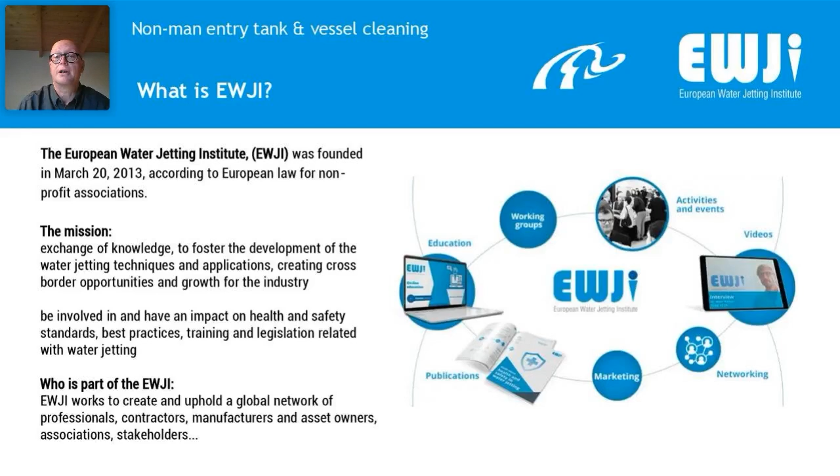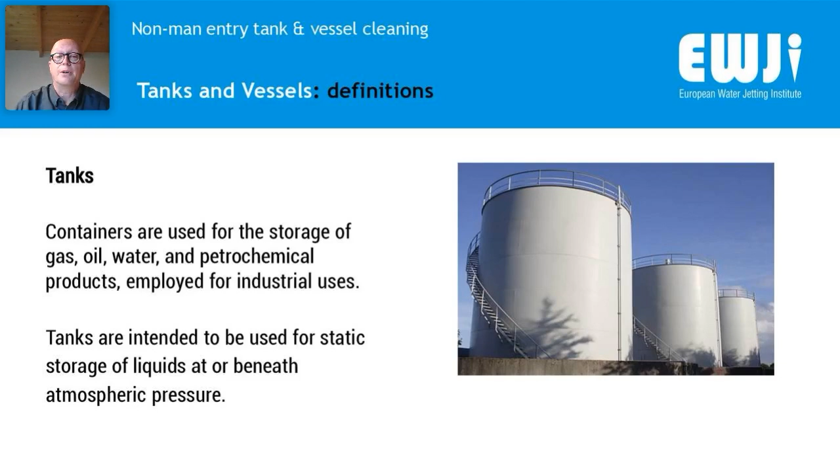So, tanks and vessels. Let's have a quick look at the definitions. Tanks are typically containers used for the storage of gas, oil, water, petrochemical products, typically employed for industrial uses. Usually tanks are intended for static storage of liquids at or beneath atmospheric pressure. Vessels are usually containers designed to hold liquids, vapors or gases, crucially at pressures above 15 psi, or 3.29 bar here in Europe. In particular, vessels store products such as petroleum, chlorine and ammonium.

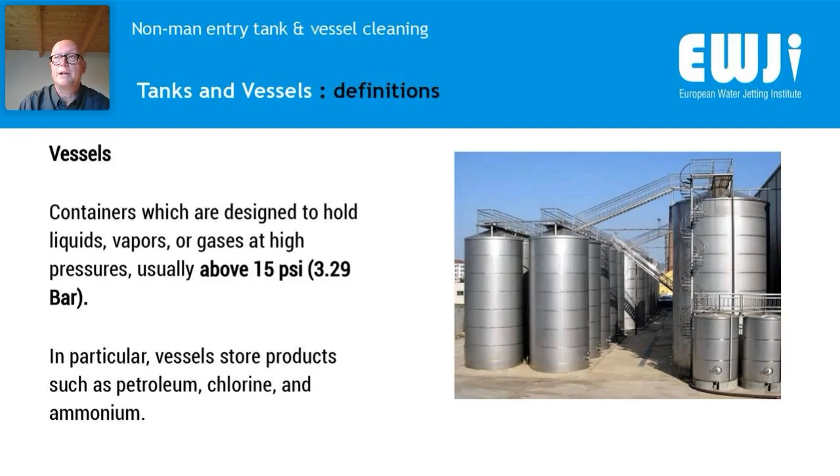So here we're going to look at the three concerned parties in non-man entry tank cleaning: the asset owner, the contractor and the manufacturer, and we're going to talk about the relationships between them and the key decisions they make.

Looking at the asset owner and the contractor, the asset owner's requirements and priorities need to be clear. They need to be clear on the job in hand, the execution, and compliance related to reducing risk methods. The contractor in turn needs to make sure the asset owner has been made aware of the technology and the safest methods of automation available. This then allows both of them to make the best possible informed decision.

From an asset owner's perspective, considerations need to be along the lines of timeframe: how quickly does the job need to be done, when does it need to be completed, proper handling and disposal of the waste product generated from cleaning the tank or vessel, and safety and environmental issues concerning potentially hazardous products coming from the tank, including entry hazards and emission hazards produced from the cleaning.

There needs to be consideration from the asset owner on the proper industrial cleaning method or methods, as there may be more than one, for cleaning the tank and vessel. This includes securing a qualified and competent company to carry out the safe cleaning of the tank, and the economic factors and quotations for the cleaning operation.

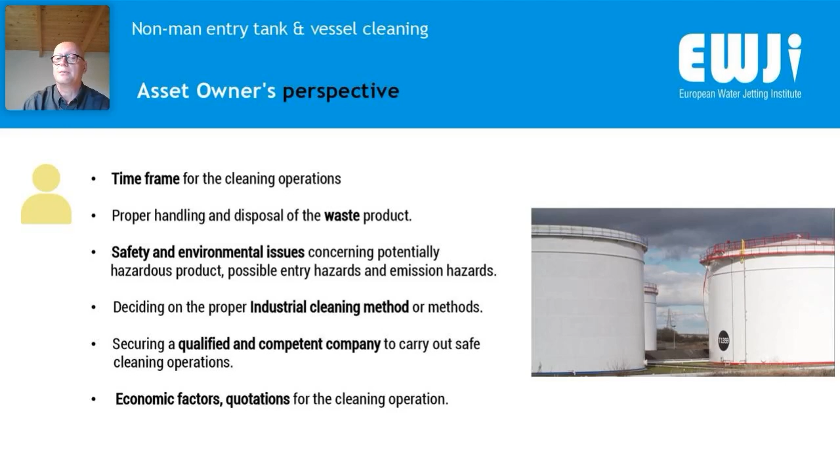From the asset owner's perspective, there's the time of year and weather issues. Certain times of year bring certain challenges - summer being hotter weather, winter being colder, brings its own challenges as well, such as ice, freezing, and snow. There's also the complexity of the cleaning operation - some tanks have built-in mixers, sensors, turbulence plates, etc., which adds complexity to the cleaning.

The asset owner needs to have an expected quality of the cleaning operation - what standard are they expecting to achieve. There may be joint operations with two or more companies, involving cranes, hand workers, electricians, etc., which adds several challenges.

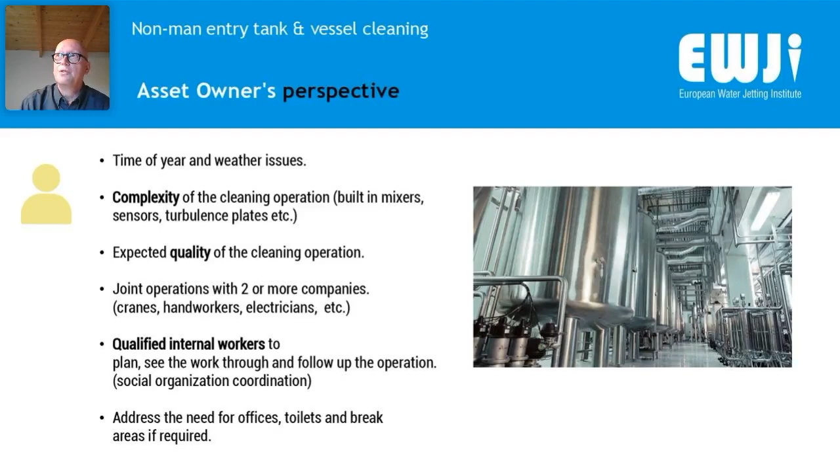Considerations also include qualified internal workers, the plan that will see the work through, the follow-up of the operation, the social organization, and the coordination of everything working together harmoniously. The asset owner would also need to address the need for offices, toilets, break areas - all the social aspects that need to be included on the site.

From the contractor's perspective, they need to approach more customers to involve stakeholders early in the tender process, involving client maintenance managers, HSE, on high-risk activities with low-risk methods. There needs to be a changing mindset to move away from the traditional hands-on approach to a safer, hands-free, non-man entry cleaning method, and this takes time.

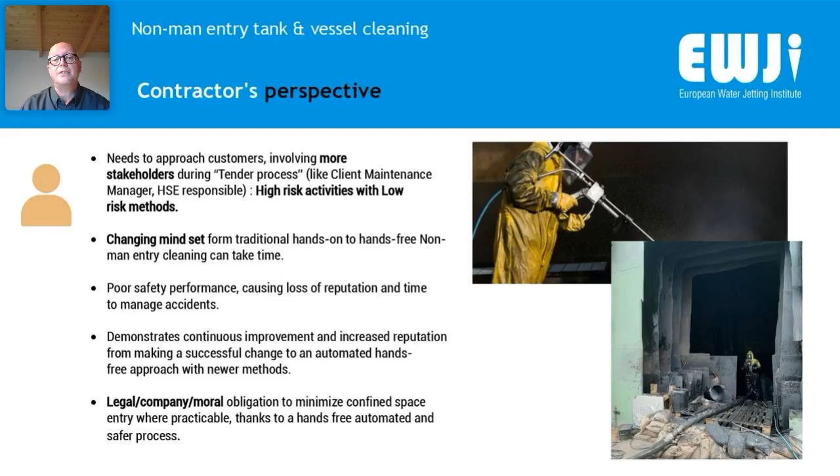From the contractor's perspective, poor safety performance leads to loss of reputation and time spent managing accidents. There needs to be a demonstration of continuous improvement and increased reputation by making a successful change to an automated, hands-free approach, which newer methods will demonstrate. There's a legal, company, and moral obligation to minimize confined space entry where practical - thanks to a hands-free, automated, and safer process.

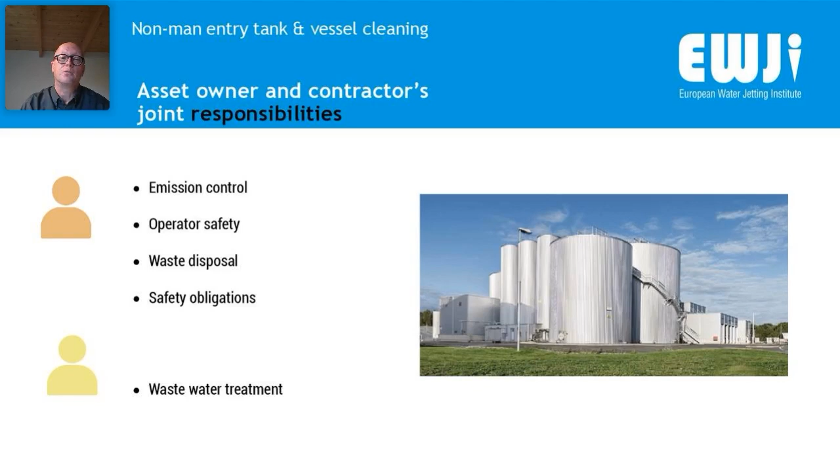It's the asset owner and the contractor's joint responsibilities to consider emission control, operator safety, waste disposal and safety obligations, and also the wastewater treatment that's produced thereafter. From the manufacturer's perspective, the manufacturer needs to have a good and clear understanding of the asset owner and contractor's joint expectations, a good and clear understanding of the application, the equipment sustainability, the on-site conditions, and the timescale to achieve the job. That's my part of the presentation completed.

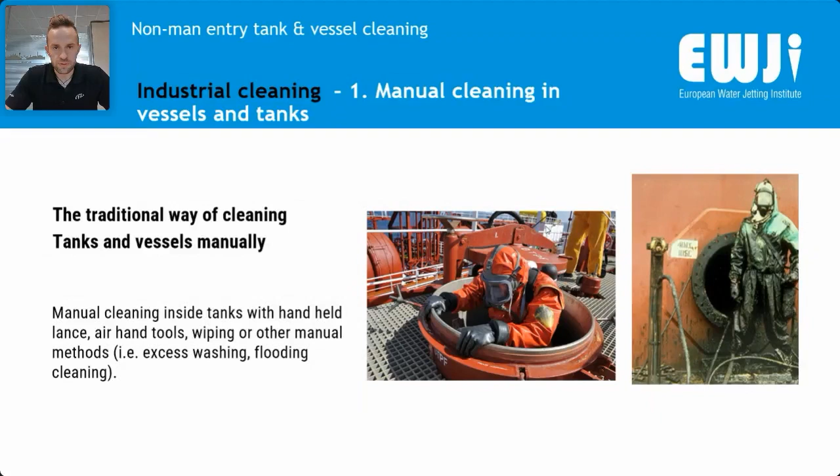There are pros and cons. The pros are that the costs are lower for equipment, that the workers are already familiar with the manual equipment, the mobilization is usually easy, you don't need a high-skilled workforce, and the job usually is simply done.

The cons are that the risk is very high for the operators who are exposed to the hazards, both of the materials and the gases present in the tanks. The operator usually gets tired due to the manual operations. They need breaks, and breathing apparatus is usually required. There are also visibility challenges like misting and lack of lighting, and you definitely need first aid on site.

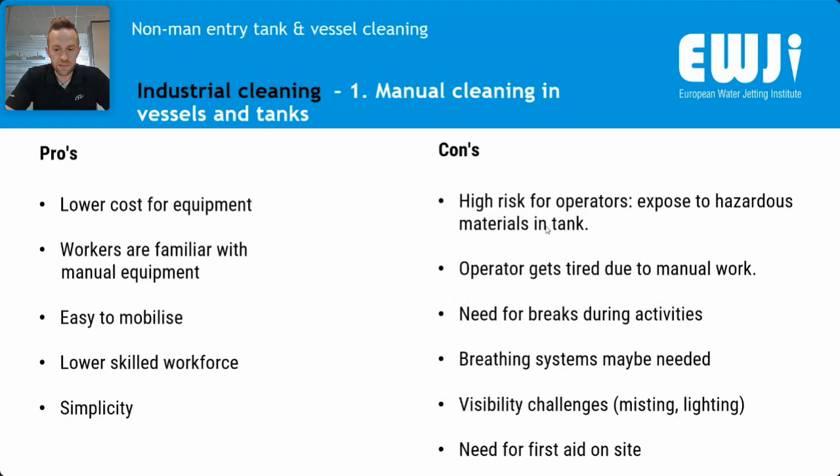We have semi-automated cleaning in vessels and tanks. In this, we're going to talk about 2D tools.

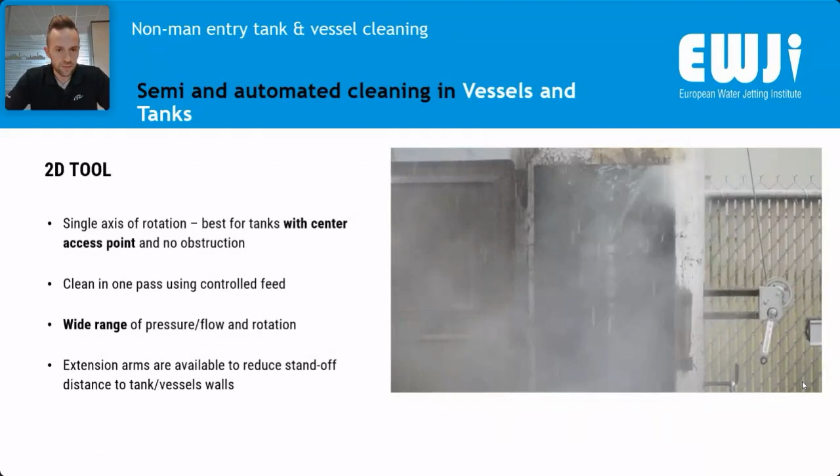We have in this video a single axis of rotation, which is preferable to be used in tanks which have a center access point and without obstruction. The cleaning is done in one pass using controlled feed. We have a wide range of pressure, flow, and rotation speeds available, and there are extension arms available to reduce the standoff distance to tank and vessel walls.

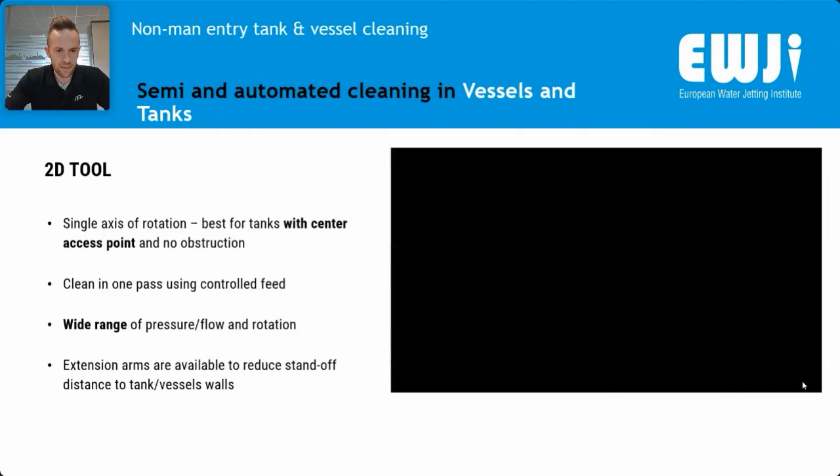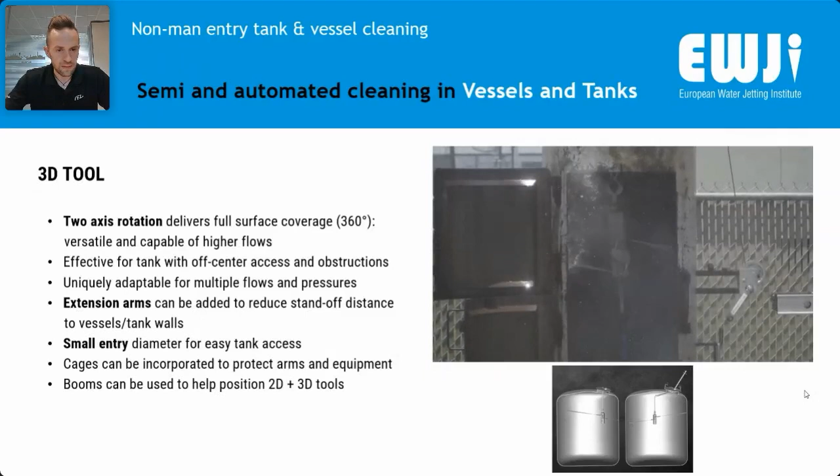We can also have 3D tools, which have two axes of rotation and deliver full coverage of the surface to be cleaned. They are versatile and capable of higher flows. They are effective for tanks with off-center access and obstructions inside. They are adaptable for multiple flows and pressures. Extension arms are available which can be added to reduce standoff from the vessel tank walls. They are suitable for small entry diameters.

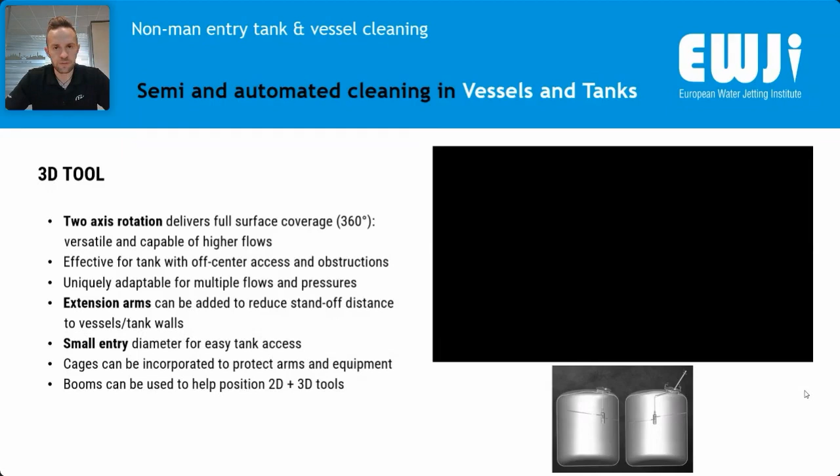And we have cages that could be incorporated for protecting the tool, as well as booms that can be used to help the positioning of the 2D and 3D tooling.

What we call tank cleaning cannons are engineered to mount in existing manway openings. They have a single jet and deliver more cleaning power with higher reach. They usually have 3 axes of movement for complete internal cleaning operation. Cameras are included, and the operation is controlled remotely from outside.

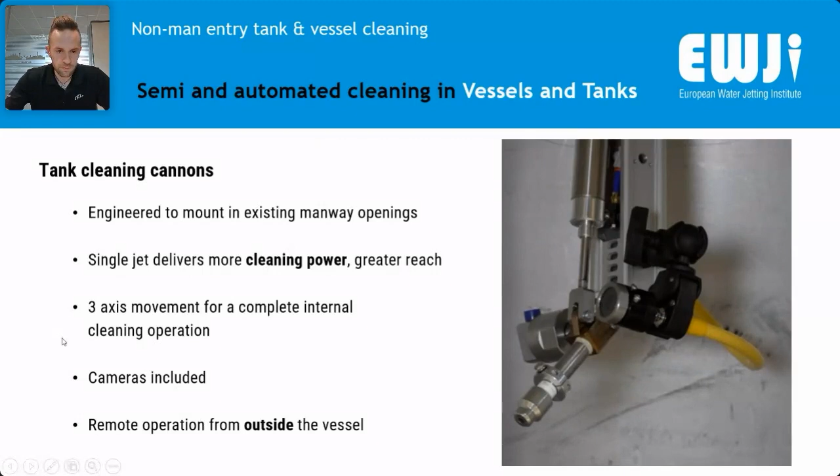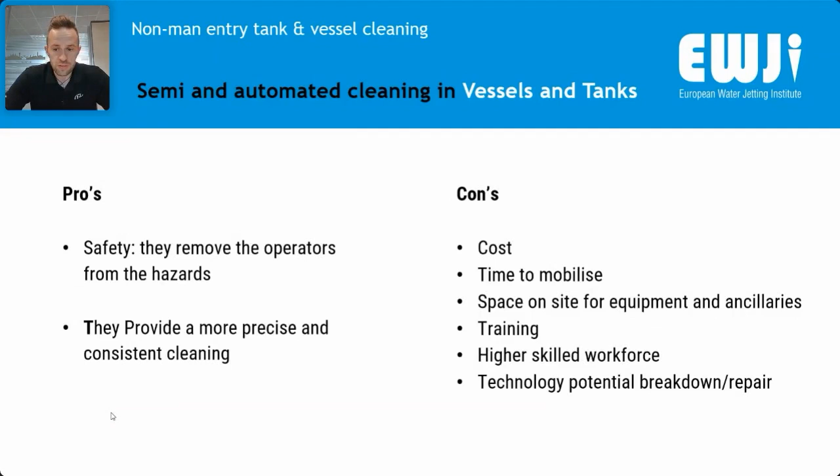The pro of using this kind of technology is definitely safety, because it removes the operators from the hazards and provides a more precise and consistent cleaning. The cons are the cost, which is higher compared to manual cleaning, the time to mobilize, which is also higher compared to manual cleaning, the space on site needed for mobilization of the equipment, training needed for the operators, a higher skilled workforce required, and the technology could potentially suffer breakdowns and need repair.

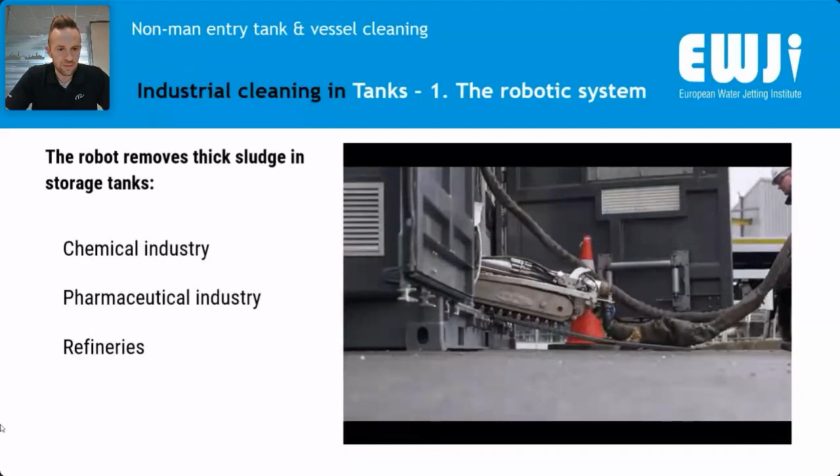The robotic systems that can be used in the tank cleaning process are able to remove thick sludge in the storage tank. They could be used in the chemical industry and in the pharmaceutical industry, as well as refinery.

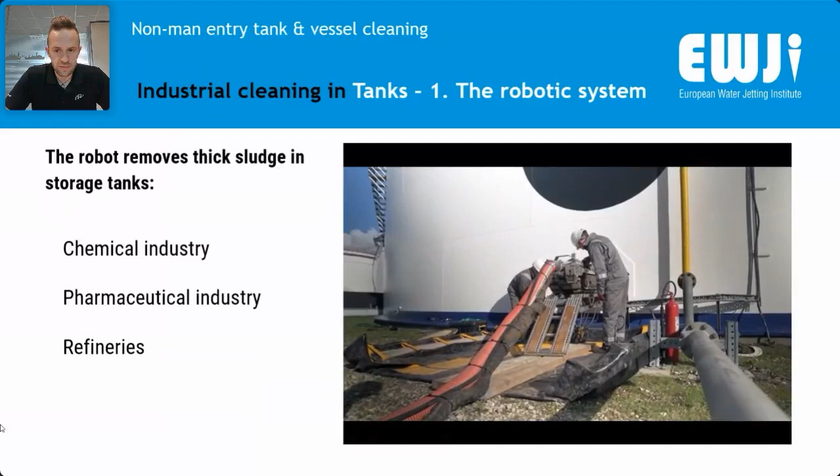In the video that is playing, you are able to see a typical job site organization and how the activity is actually started, while the robot can enter the manway without the need for a person to enter the tank to allow the robot to enter.

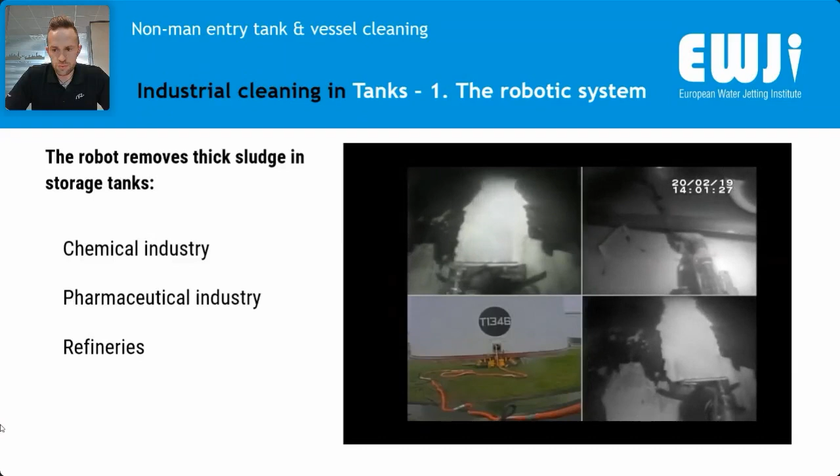The controls are made from a safe distance, and the robot is equipped with cameras that allow the operator to follow and control the operation from a safe position.

Over 200 confined space incidents happen across Europe every year, and the cleaning time can also be reduced by up to 45%. It's considered a safer, faster, cleaner, and more efficient method.

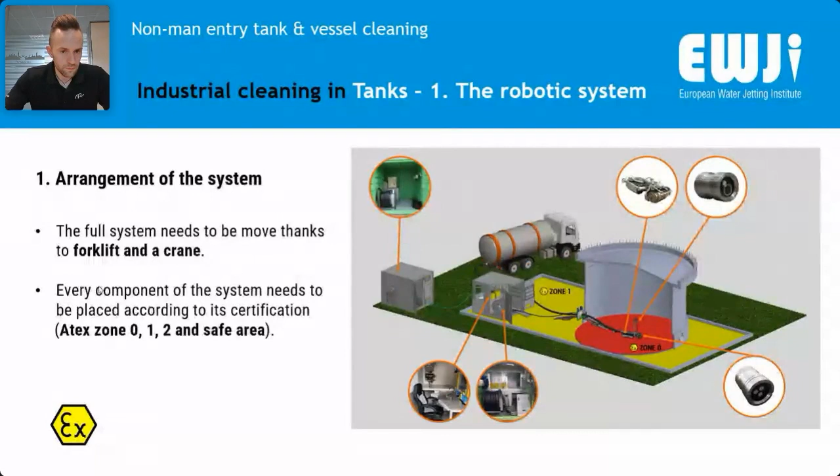The tank cleaning operations are organized with the robot working in zone 0, driven by the operator safely inside the control room, and monitoring the operation through the camera system.

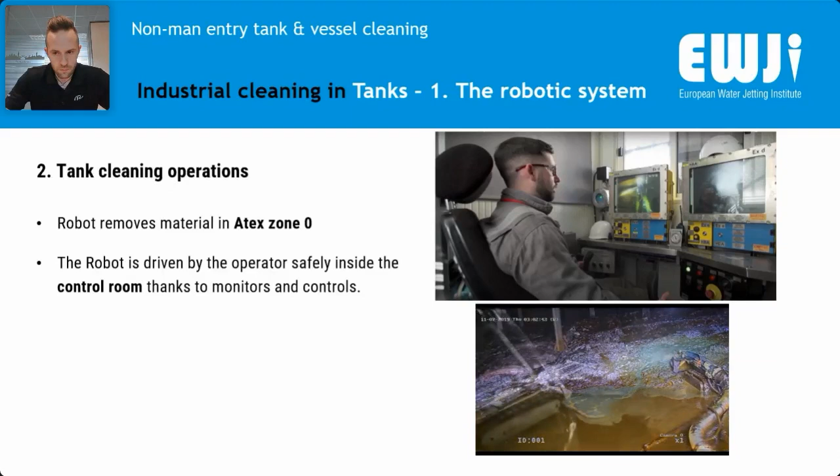The pros of using the method are operator safety, lowered tank downtime, the transformation of variable cost into fixed costs, the ATEX Zone 0 certification for products that ensure maximum safety level, safe and clear remote viewing, and the possibility to customize the system according to job site needs.

The cons are that the system alone cannot do material recovery, the initial time spent learning how to use the technology is higher compared to other methods, the cost and investment is higher at the beginning, the space requirement on site, and the training needed for the person, because in this scenario we need a specialized technician to use the equipment.

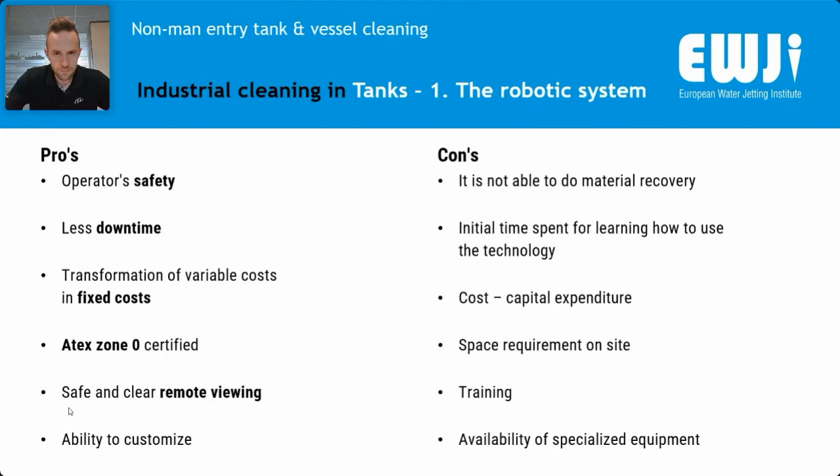The sweeping system is definitely another option that we're going to present through this video. Traditional tank cleaning methods may appear to be low cost, but the man-entry approach results in difficult health and safety procedures, large waste volume, and lengthy downtimes.

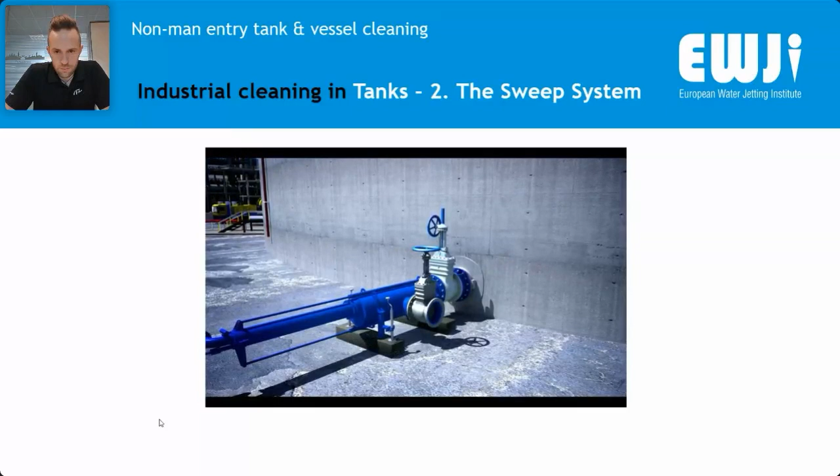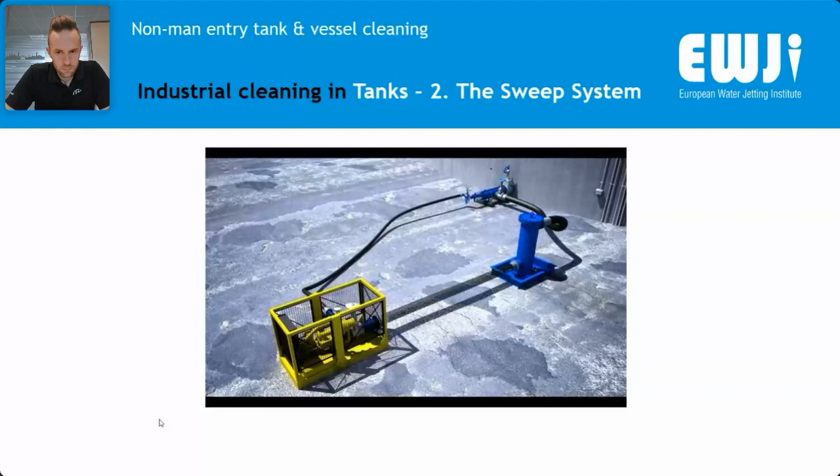A pump is fitted, together with hoses and a filtration unit. The tank sweep jet streams are directed through nozzles into the tank. The contents are circulated under high pressure and carefully controlled. The movement and pressure are strictly monitored to ensure complete mixing throughout the tank. This procedure ensures safe and spill-free operation. The liquid is recycled via the filtration system.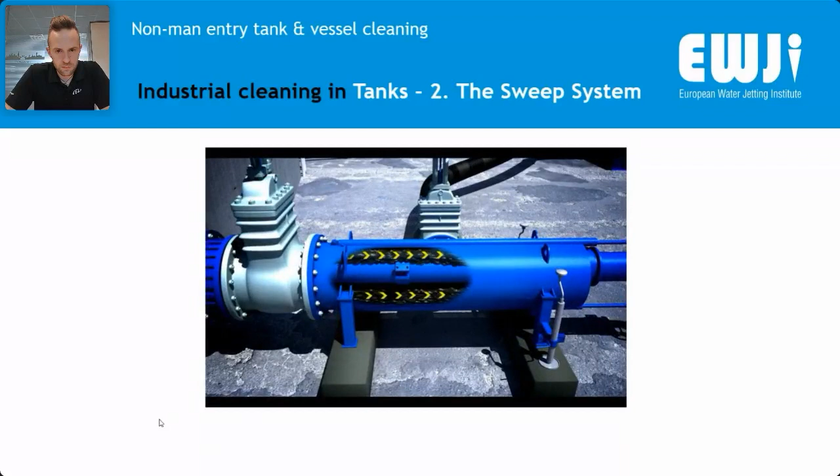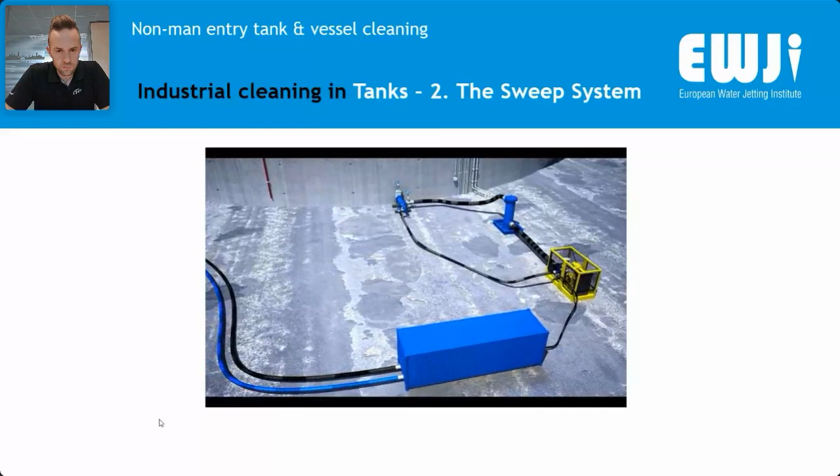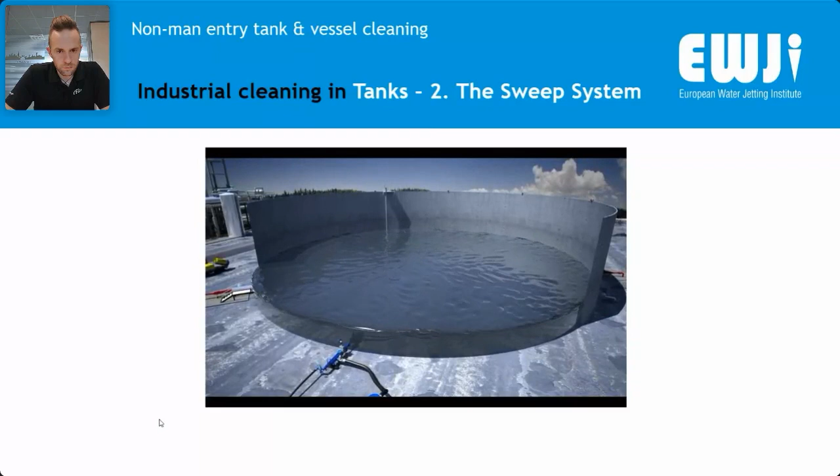Once the tank contents are fully homogenized, slipstreaming commences to direct the fluid to the treatment plant. The treatment plant removes the solids from the homogeneous stream. The solids are separated out, and the oil and water are returned to the tank to maintain the required safe operating level during tank sweep operations. Once the required specific gravity in the homogenized fluid is achieved, the tank sweep operation can end, and the tank is allowed to settle to separate the remaining oil from the water. The recovered oil can be pumped to adjacent storage as required.

The tank sweep process is highly efficient, substantially reduces downtime and cost, as well as being safer and better for the environment.

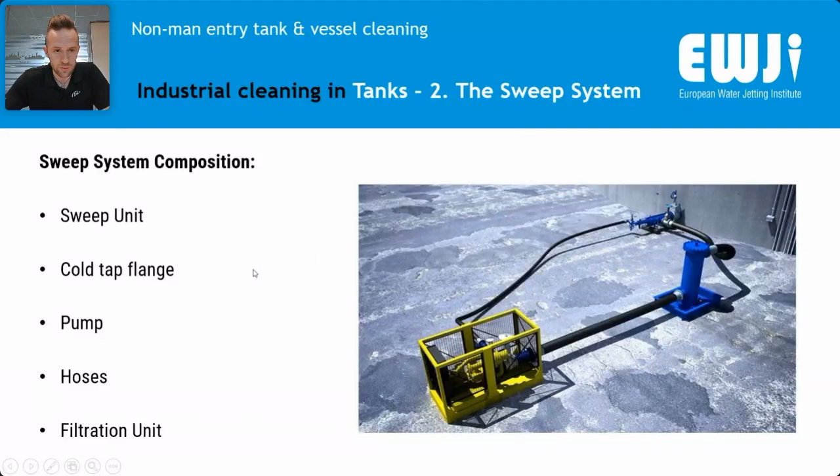As shown in the video, the system composition is made of the sweeping unit, the cold tap flange, the pump and hoses needed, and the filtration unit. Summarizing how this works: the tank sweep jet streams are directed through nozzles into the tank. The liquid is recycled by a filtration system, and the solids are separated out. The oil and water return to the tank. Once the specific gravity required is reached, the process can end.

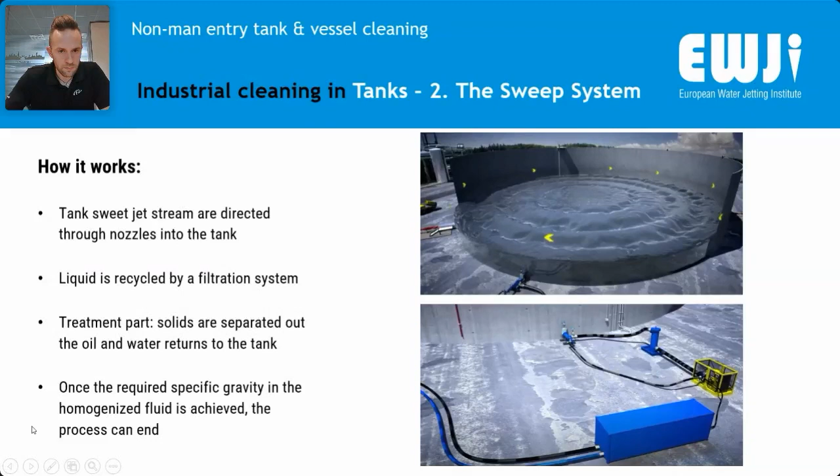The pros of using the sweeping system are that it's more efficient directional cleaning over traditional heat and circulate. It's ideal for crude tanks to allow safe landing of floating roofs, can delay associated waste cost or allow full recovery, can utilize the refinery to process material where it stays suspended, and it's ideal for tanks with high sludge content, which prevents the use of manhatches and safe landing of floating roofs.

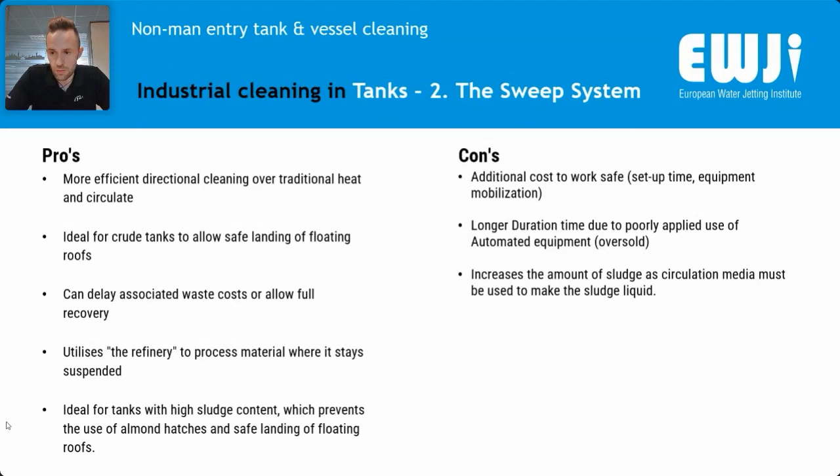The cons are that there are additional costs to work safely, setup time, equipment mobilization, and etc. It takes longer, the duration time being longer due to the poorly applied use of automated equipment, and it increases the amount of sludge as a circulation media must be used to make the sludge liquid.

The other technology available for tank and vessel cleaning is the magnetic crawler, mainly for outside of tank walls and some inside cleaning. They can use water pressure up to 3000 bar, 43,000 psi.

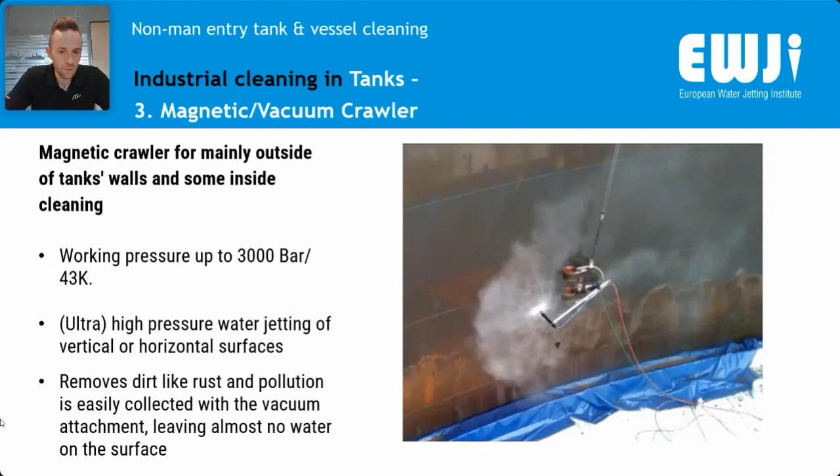They are able to use ultra high pressure water jetting on vertical or horizontal surfaces. They remove dirt like rust and pollution easily, collecting it with a vacuum attachment, leaving almost no water on the surface. There is no need for scaffolding or cherry pickers, and the hydroblasting with vacuum system allows recovery.

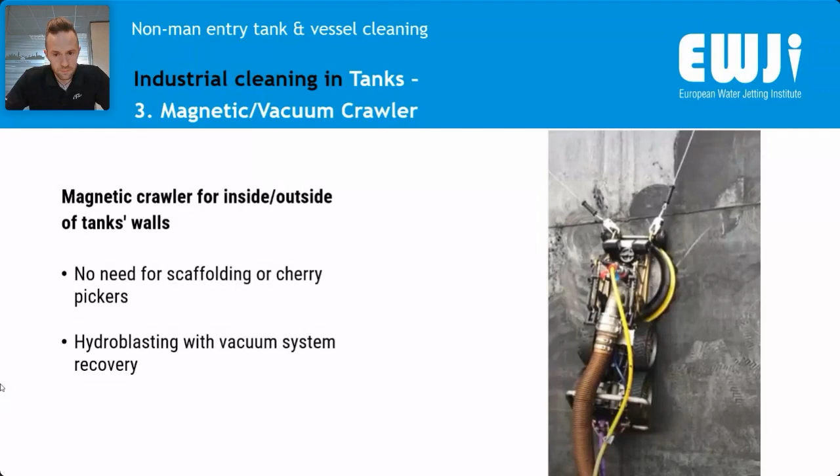The pros are that they are very easy to operate. There is no need for cranes, cherry pickers, or scaffolding. The operation is done from a safe distance. The productivity is good compared to manual methods, and the crawler can be utilized for abrasive blasting as well.

The cons are that there is an expensive investment, training is needed, and there is a potential footprint to consider on site for the pump and the vacuum unit.

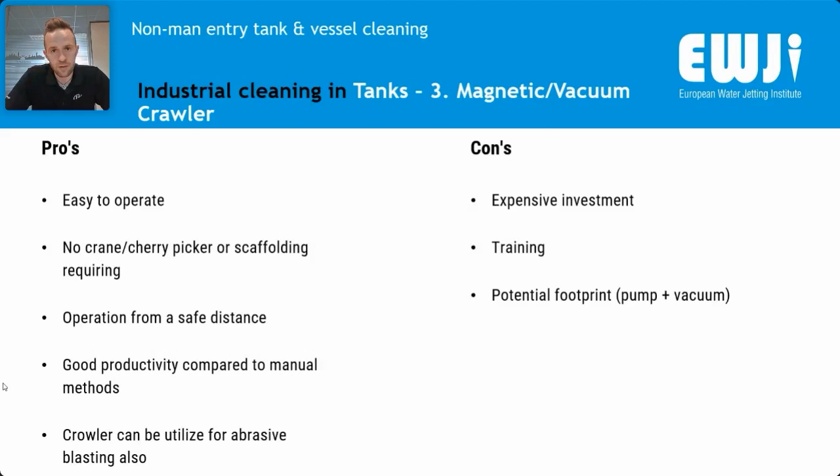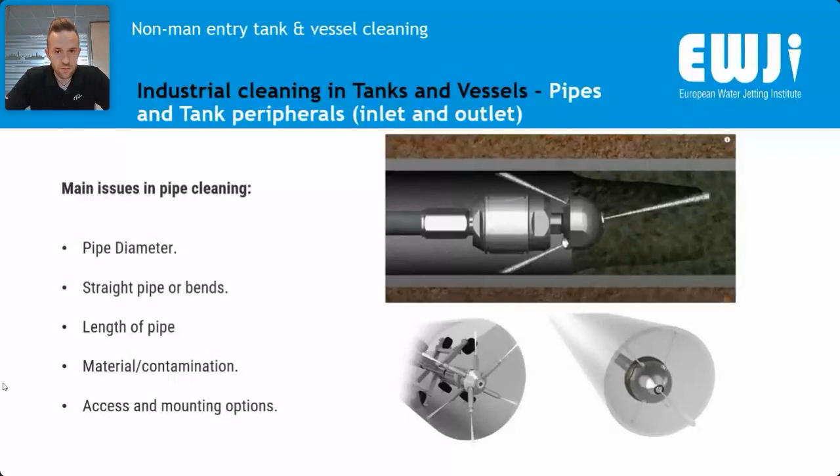What is usually not considered when talking about tank and vessel cleaning are the pipes and tank peripherals for the inlet and outlet. The main issue in pipe cleaning is the pipe diameter, whether the pipe is straight or has bends, the length of the pipe, the material contamination, and the access to the entrance of the pipe for mounting equipment.